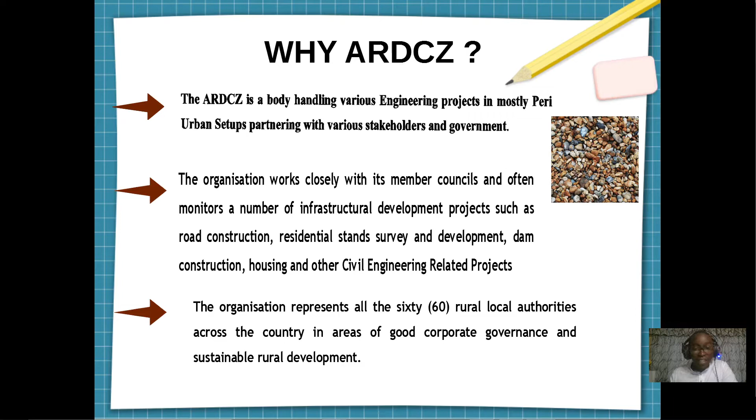Why the ARDCZ? The ARDCZ is a body that is handling various engineering projects in mostly peri-urban setups, partnering with various stakeholders and government. This organization is working closely with member councils, and it often monitors a number of infrastructure development projects such as road construction, residential stand survey and development, dam construction, housing, and other civil engineering related projects. I got so much exposure in a number of different projects.

First, I'll look at the residential projects that we were handling as an organization. For example, in Umguza RDC, I got there at a later stage where they were already at scaffolding and shuttering. As you can see on the pictures, the columns had already been casted, and they were at the stage of shuttering and putting beams so that they could cast them.

We were also in Muzarabani RDC, looking at the ground beams that were setting out there. We were in Chiredzi RDC as well.

There is a picture of a base and stub column, which I also assisted in design. We used Y12 bars for the base and Y12s for the starters and Y8s for the links. The rest of the pictures are self-explanatory.

We were in Goromonzi RDC, Chiredzi RDC as well, and most of them were deck inspection and casting site inspections.

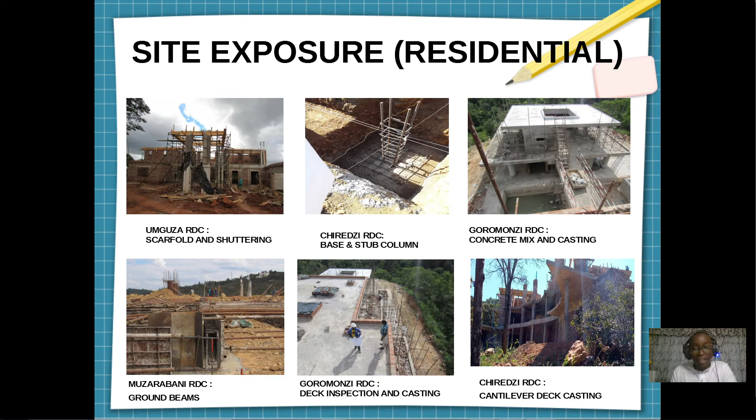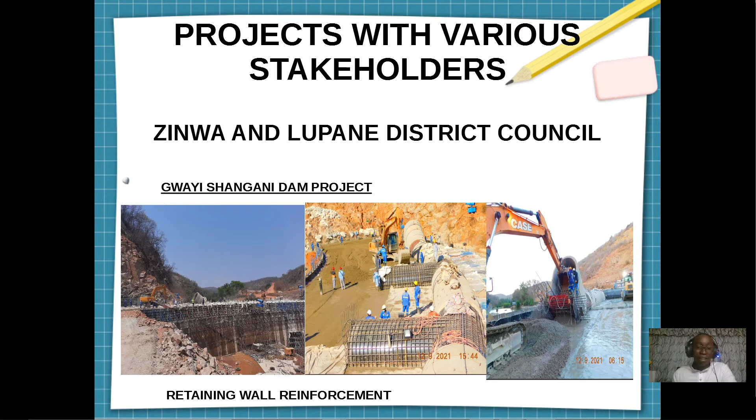We were partnering with various stakeholders, including Zinwa and Lupane District Council, looking at the Gwayi Shangani Dam project. The most important aspect that I got to grasp was the reinforcement for the retaining wall, as you can see in the picture, when they were reinforcing a retaining wall to improve the soil structure or the soil bearing capacity that was going to hold the retaining wall for the dam itself.

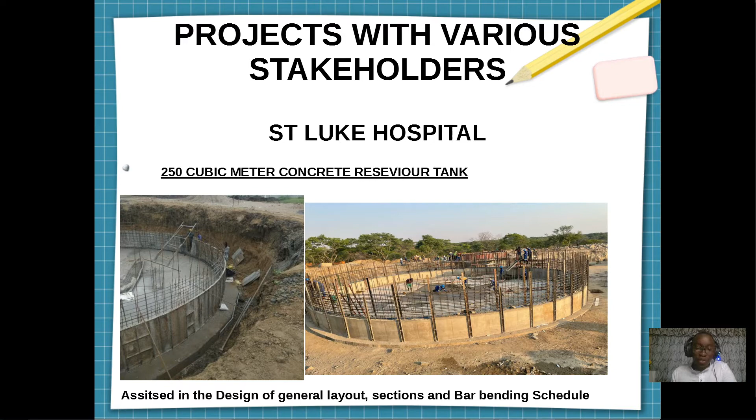We also worked with St. Luke Hospital, where they were creating a 250 cubic meter concrete reservoir tank. We assisted in the general design, the sections and the bar bending schedule. It was a good experience for me to actually get exposed to how we create a bar bending schedule and the layout and the drawings for a tank.

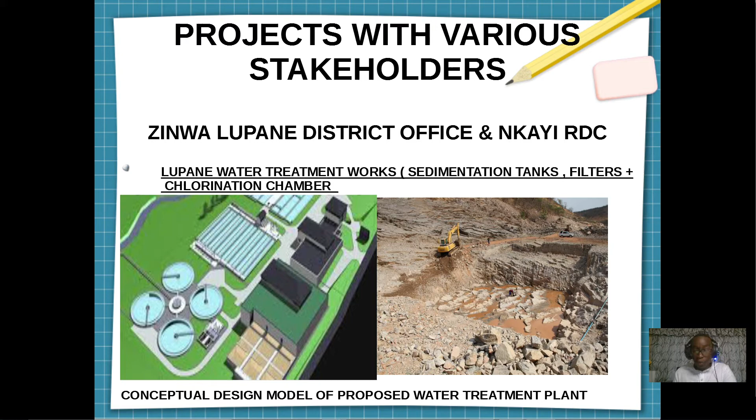We also partnered with Zinwa, Lupane District Office and Nkayi RDC, where they are in the process of designing a water treatment plant. This is still at design stage, and as you can see in the picture, we have a proposed water treatment plant conceptual design model that we proposed for them to implement.

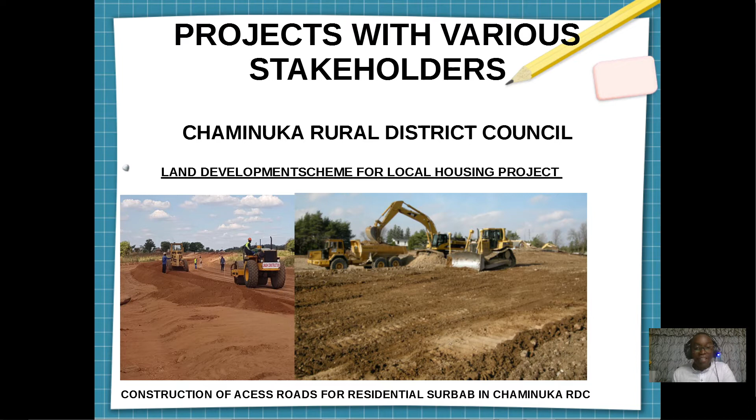We also partnered with Chaminuka Rural District Council, where they are doing a land development scheme for local housing projects. At the moment, they are in the process of constructing access roads for a residential suburb in Chaminuka RDC. The land clearance has already been done, and they seem to be on track with the project.

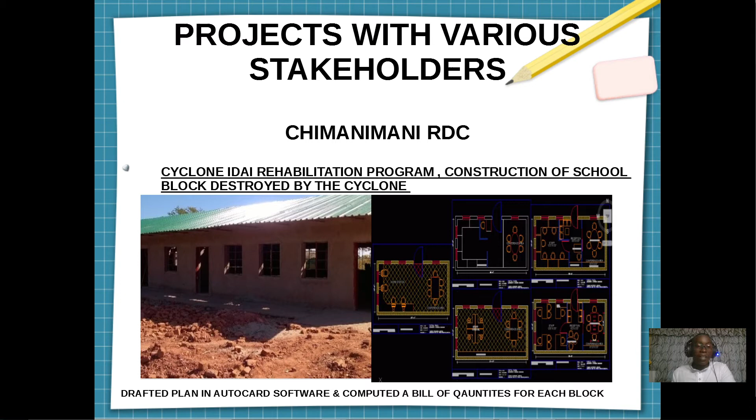We were asked to draft a plan for construction of a school block that was destroyed by Cyclone Idai. This is under the Cyclone Idai rehabilitation program in Chimanimani RDC. Those in the pictures are some of the drawings that we did, and on the left is the block that has already been roofed with IBR sheets.

The professional workshops and conferences attended: the ARDCZ is a body that also hosts workshops and conferences.

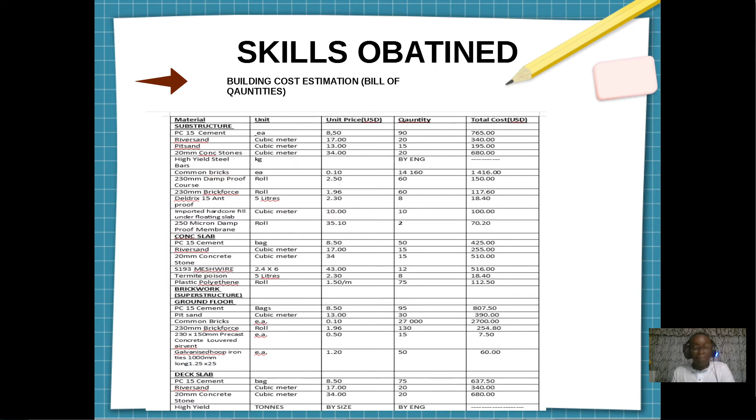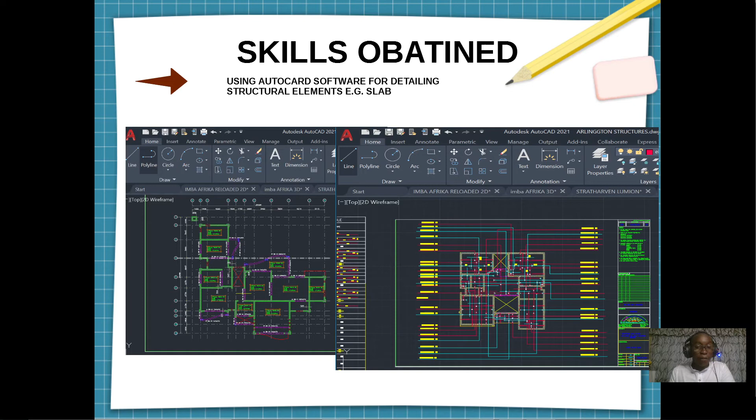I also got to understand how to compute a bar bending schedule for reinforced concrete elements, for example columns, beams, and decks. That is the template we were mostly using when designing our bar bending schedules. That one was for a first floor slab or first floor deck, and that is a schematic showing how the bending schedule was computed.

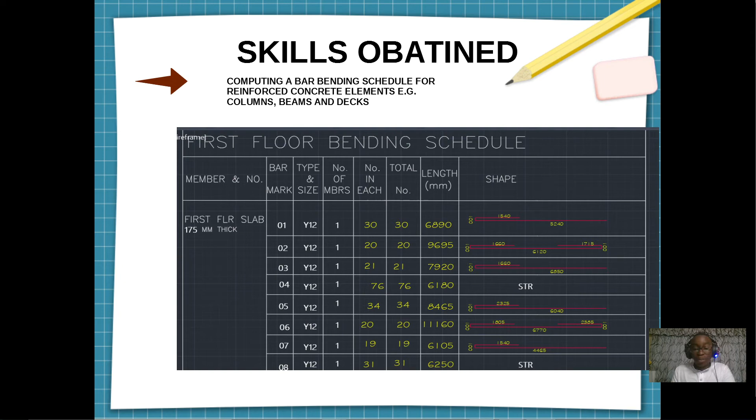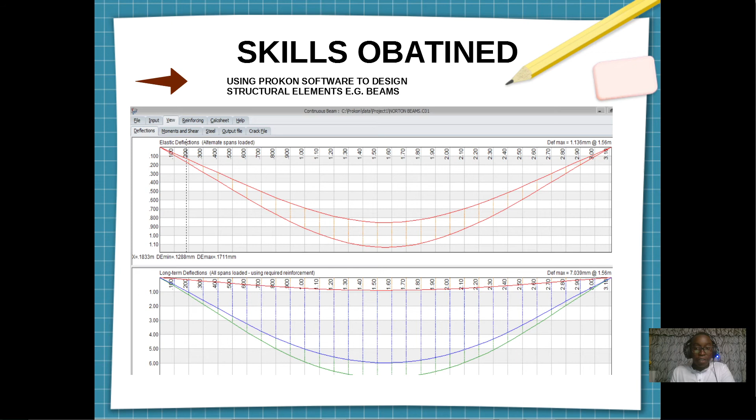We also learned how to design structural elements using PROKON software. That is PROKON software, as shown in the diagrams there, designing a beam, showing your deflections for the long term and short term periods. We got much exposure as far as PROKON design software is concerned.

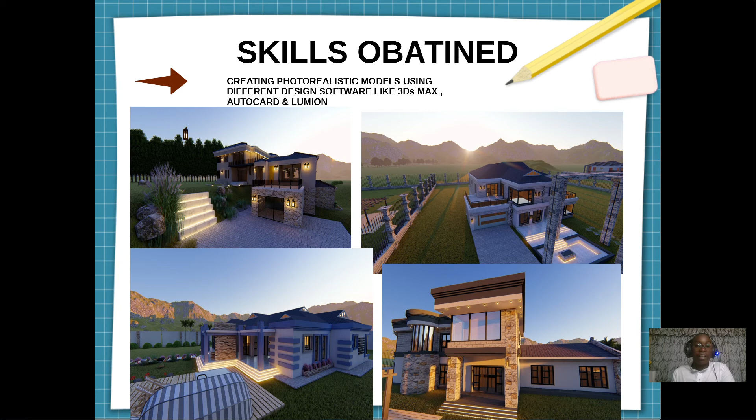On the screen there, we got to learn what are called photorealistic models, which we designed using different design software like 3ds Max, AutoCAD, and Lumion. Those ones are not really residential units; those are actually drawings that we were making through the use of different software.

The problems we encountered during the attachment period were mostly rooted to one major source, which is the COVID-19 pandemic. We did not really get so much time or so many site visits because of the travel restrictions given by government, and we got limited exposure due to having a limited number of site visits. We also held fewer conferences for networking with other prominent engineers.

In conclusion, I would like to thank God for the students' attachment year, for it was a success, and my appreciation also goes to all the staff at the ARDCZ for the learning experience that I gained. I became proficient in the use of software and gained vast experience when it comes to site inspections and working under pressure. I now have an appreciation of what civil and water engineering is all about.

In recommendation, I would recommend the National University of Science and Technology allow more industrial site visits during the first three years of learning so that students are familiar with the work environment prior to attachment. And to the Association of Rural District Councils of Zimbabwe, I think there is need to formulate a technical department within the organization so as to deliver to its member councils. I thank you so much.